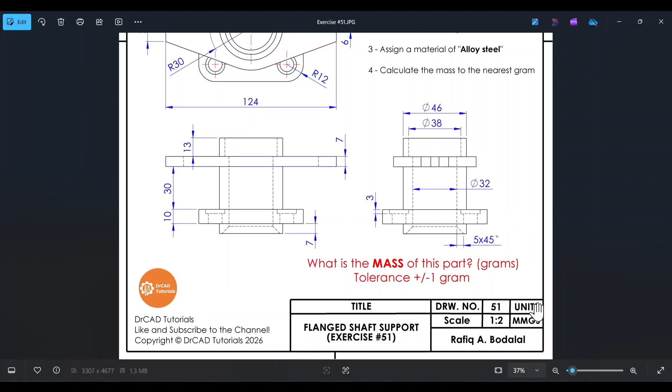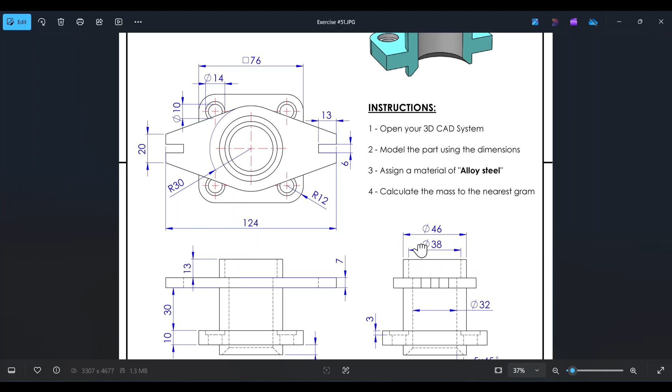Of course, we also have a set of instructions which are, needless to say, pretty self-explanatory, but the key takeaway is that at the end of the modeling process, we need to assign a material of alloy steel. And of course, we have a question here at the bottom that says, what is the mass of this part in grams? The answer should be given within a tolerance of plus or minus 1 gram.

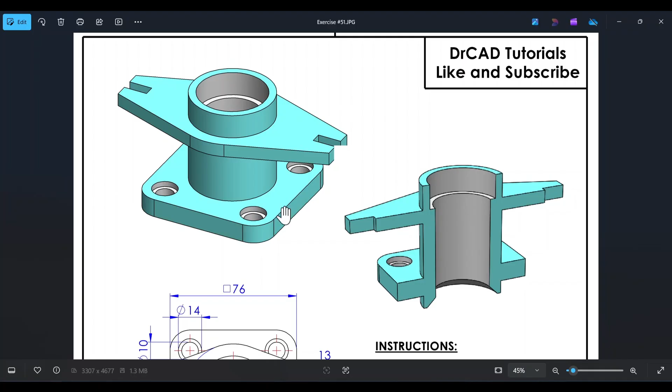We're going to follow a feature-driven approach in creating this component. The obvious first step would be to create the square base flange, which involves using the center rectangle tool, and then using the fillet tool to round out the four corners of the square. Then, of course, we're going to use the extrude boss base tool to create thickness.

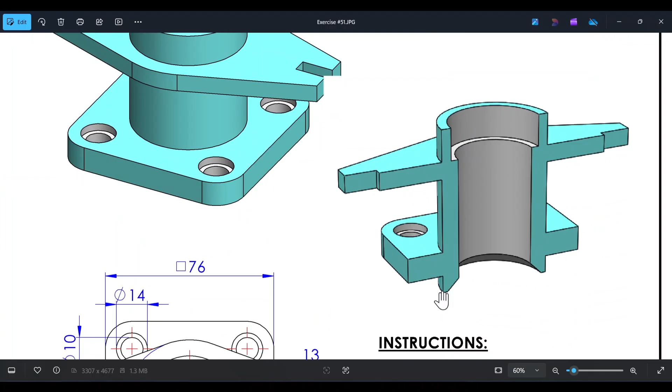After that, we're going to work on creating the cylinders. We have the top cylinder and the bottom cylinder. If we look at the section view, we should clearly see that we have a bottom cylinder. Again, we're going to use the circle tool, and then use the extrude boss base tool.

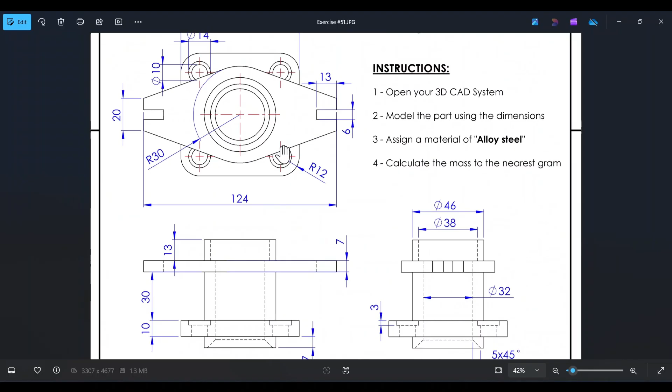After that, we're actually going to create the four mounting holes for the square base flange. These are four counterbore holes. So we're going to either use the hole wizard tool, or the more intuitive approach would be to use the extrude cut tool, and we're going to use it twice. First, to create the first cut for the larger circle, and then the cut for the smaller circle.

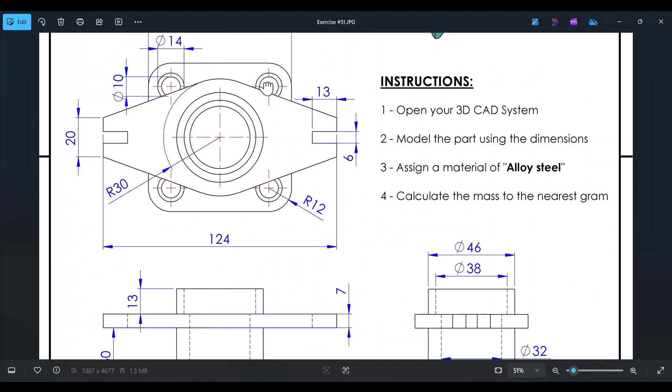After that, we're going to create the top flange. Of course, for this top flange, we have to create a new drawing plane, and the drawing plane needs to be 13 millimeters away relative to the top of the cylinder. That's a pretty simple procedure.

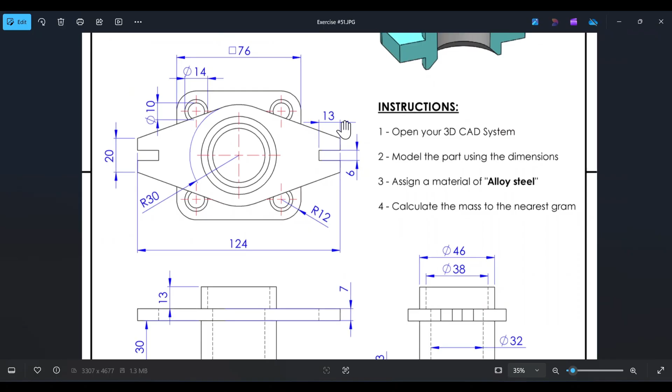Then we're going to sketch out the 2D profile of the top flange using a number of tools. Most importantly, we have the circle tool, and in addition, of course, the line tool and the rectangle tool, which is a very simple procedure.

Finally, we're going to open up the component along the y-axis. We're going to sketch out half of the opening here, the 2D sketch represented by the hidden line, and then use the revolve cut tool. That would conclude the modeling process.

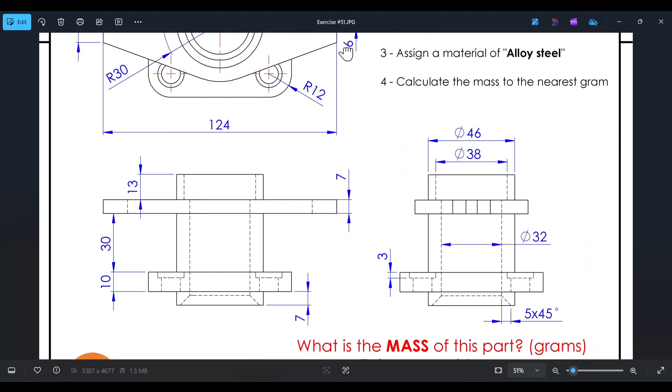Of course, finally, we shouldn't forget that we have a chamfer here at the bottom. If we look at the right view, we have a chamfer that is 5 millimeters by 45 degrees. That is the convention we're going to be following for the chamfer, a distance angle convention.

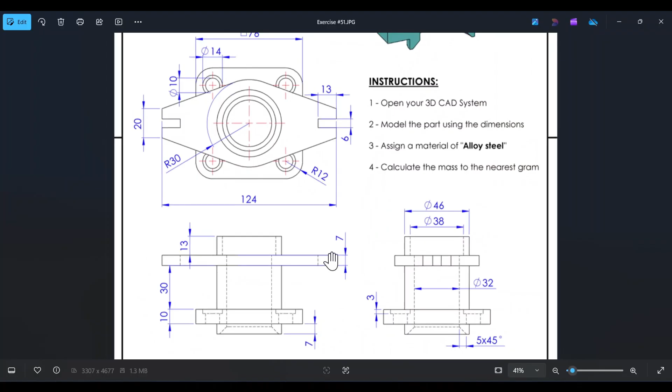All right, so this is a very simple exercise, something to have fun with. With that aside, let's get started with exercise number 51.

Okay, so let's start by creating a new SolidWorks part. Let's set the background to plain white, and let's copy exercise number 51 into SolidWorks.

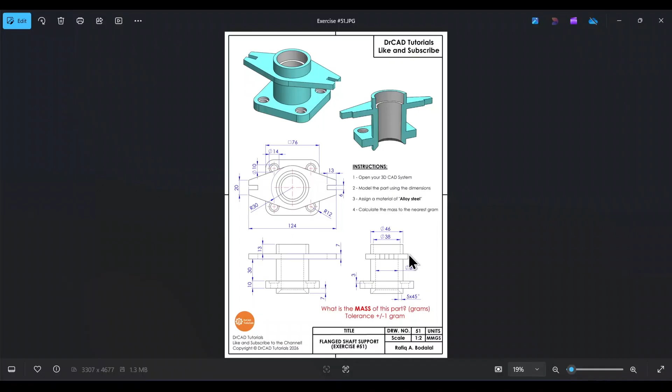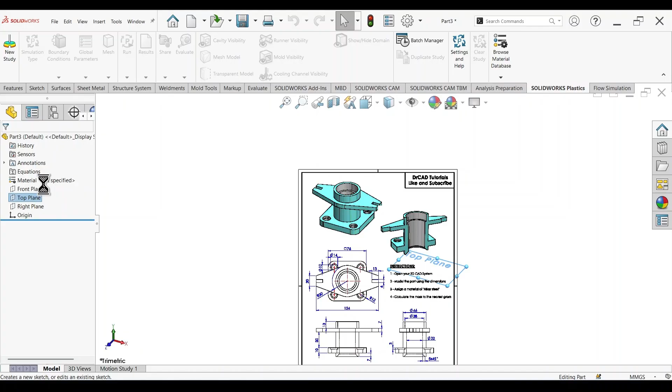Let's make this smaller and drag it upwards. As I said previously, the first step would be to create the square base flange of the component. So to start, let's select the top plane, sketch it, drag this to the side, and starting from the origin, use the center rectangle tool to create a rectangle.

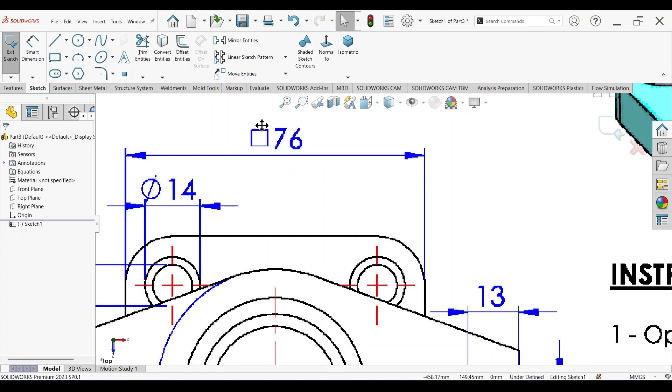Now if we look at the top view, we see that for this square base flange, we have a dimension of 76 millimeters, and we have a symbol here that looks like a square, telling us that the length of this edge and the opposite edge are equal, because it's a square. So let's activate the Smart Dimension tool and set this as 76 millimeters.

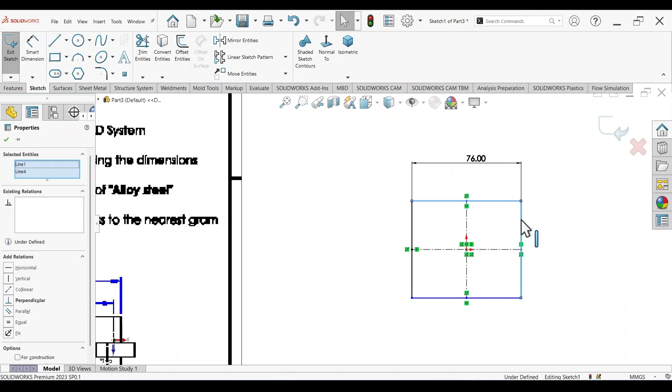Let's click on this entity, and holding down the Control key, click on this entity as well, and set the relation as equal. Now this edge here has a dimension of 76 millimeters, similar to what we created for this line.

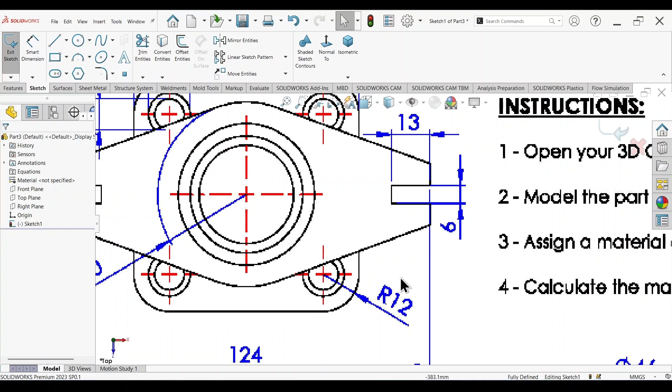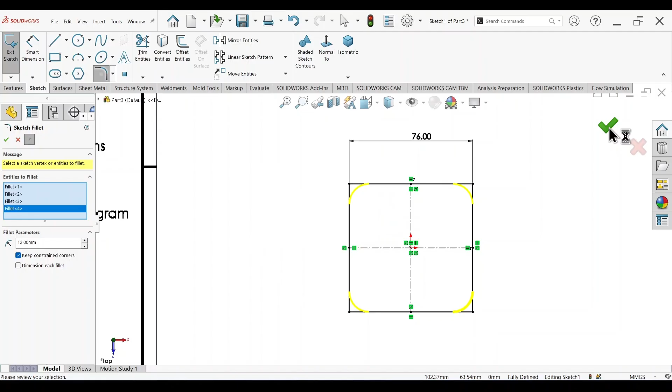If we look closely, we have fillets or rounded out edges for this square base flange, with a fillet radius of 12 millimeters. Let's select the fillet tool, set the fillet radius to 12 millimeters, and select the 4 corners of the square: 2, 3, and 4. Then click OK. So now we have the 2D sketch for the square base flange.

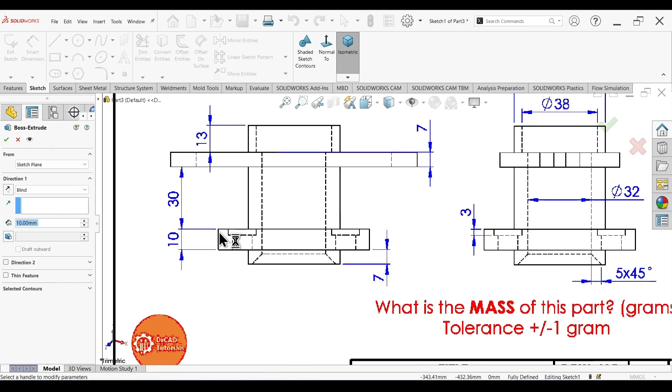Now just press the S key and click on Extrude Boss Base. If we look at the side view here, we see that the base flange has a thickness of 10 millimeters, so by default it's already set to 10. Simply click on OK, and that creates the square base flange of the component.

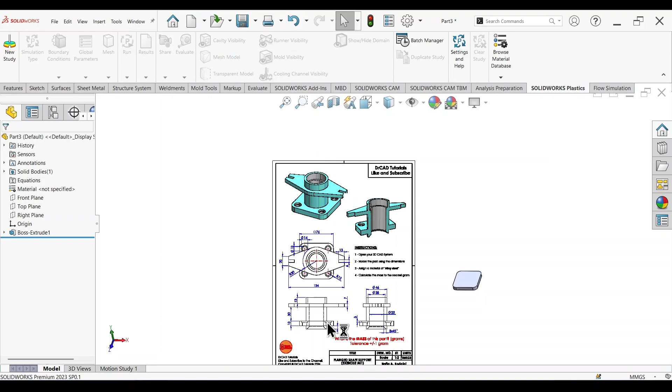If we look closely at the section view, we see that we have a cylinder protruding from the bottom face, with an outside diameter of 46 millimeters, similar to the cylinder at the top, protruding from the bottom with a thickness of 7 millimeters.

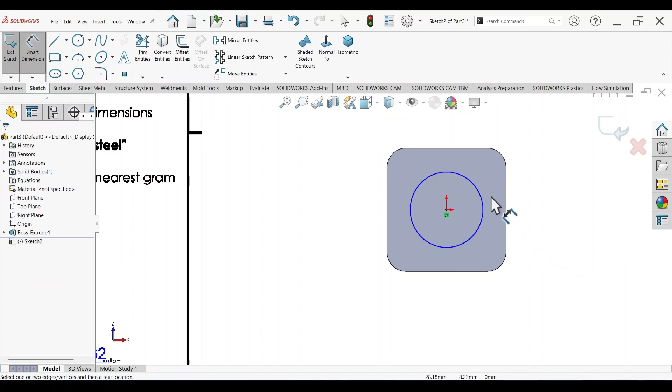So we're going to click on this back face, or bottom face, click on Sketch, activate the Circle tool, and from the origin draw a circle. Activate the Smart Dimension tool; the diameter of this circle should be 46 millimeters. Now press the S key, Extrude Boss Base, and set the extrusion height to 7 millimeters, then click OK. That creates the bottom cylinder, the protrusion at the bottom.

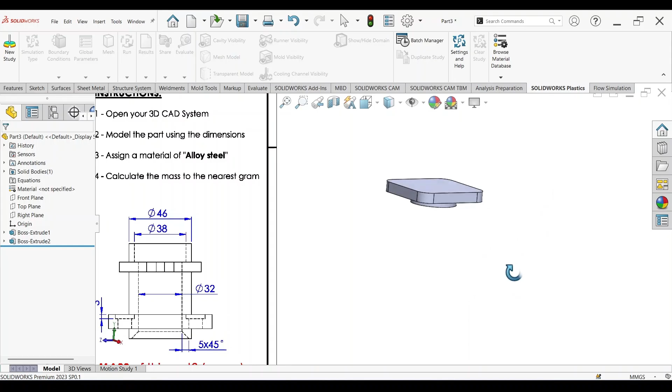We're going to perform a similar process for the cylinder at the top. Click on this top face, Sketch, activate the Circle tool, from the origin draw a circle, Smart Dimension, this should have a diameter of 46. Press the S key, Extrude Boss Base.

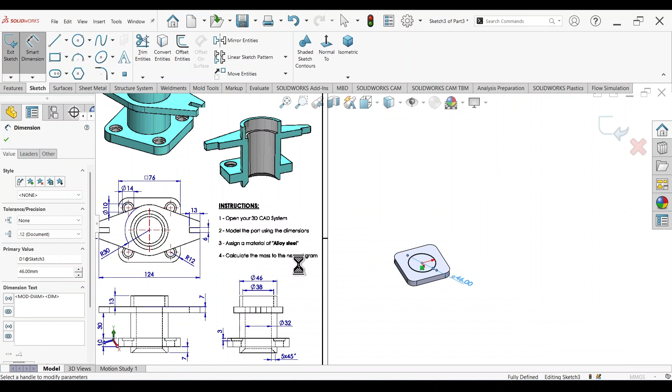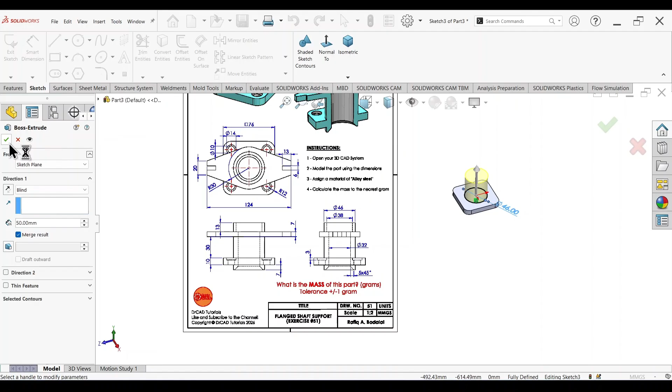The question is how high the extrusion should be. If we look closely, we have a dimension of 30, right? 7 plus 13 gives us a total height of 50. So this needs to be 50 millimeters. Click on OK, and that creates the cylinder at the top.

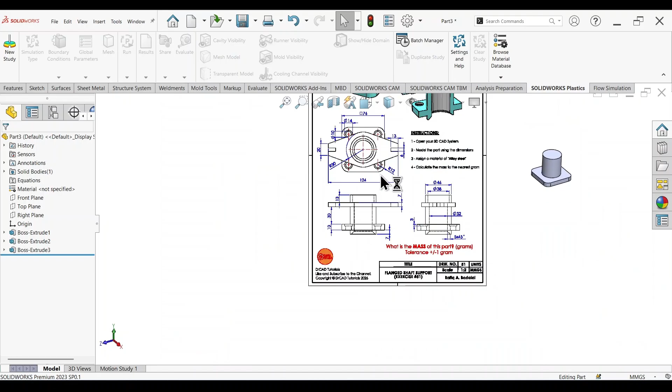Now if we look closely, we have a number of mounting holes for the square base flange, so let's create that. But we need to notice that these are counterbore holes, not normal holes, so we're actually dealing with 2 dimensions: the larger circle with a diameter of 14 millimeters, and the smaller circle with a diameter of 10 millimeters. Let's go ahead and create the first sketch.

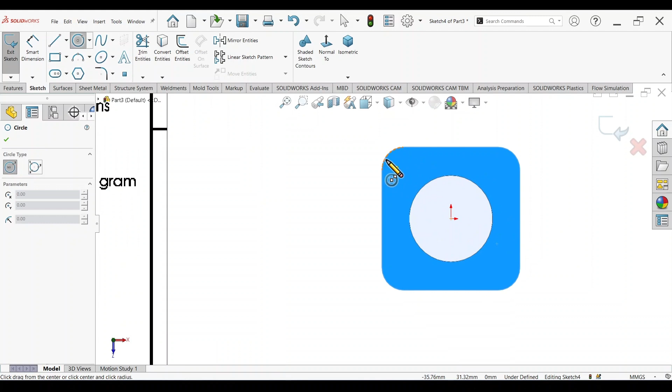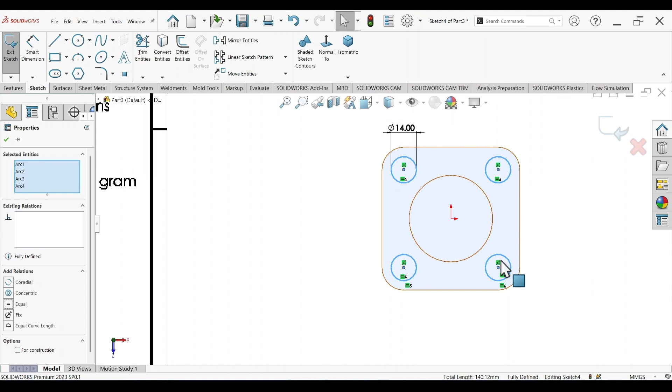So from this surface, Sketch, activate the Circle tool, and from these centers right here, we have 1, 2, 3, and 4. Activate the Smart Dimension tool, and we have a diameter of 14 millimeters for one of the circles. Click on the rest of the circles, holding down the Control key, selecting all 4, and set the relation as equal. So automatically the dimensions for the 3 remaining holes will be 14 as well.

Now just press the S key, Extrude Cut, and we're going to cut this sketch to a thickness of 3 millimeters. Set the extrusion cut to 3 millimeters, then click OK.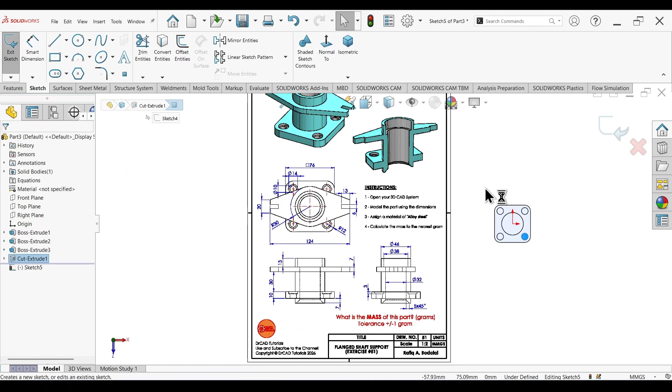Now click on this surface, Sketch, zoom in, activate the Circle tool, and from the center here draw a circle. We're going to do the same thing for the rest of the circles here: 1, 2, 3, and 4.

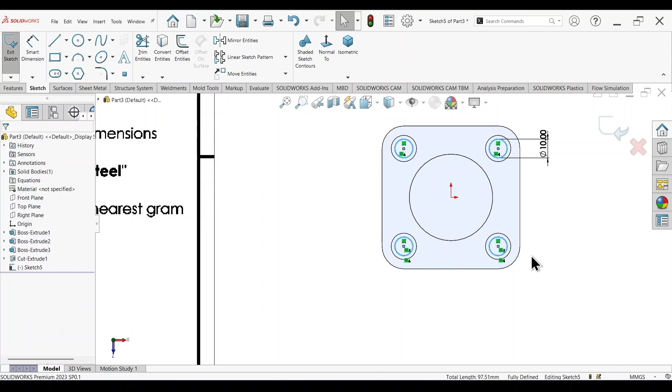All right. Activate the Smart Dimension tool. Let's set the diameter as 10 millimeters. We're going to select the remaining circles, holding down the Control key. Set the relation as equal. Now just press the S key, Extrude Cut. Right-click on your mouse and set the relation as up to next, okay? And then click OK. So that creates the 4 mounting holes for the base flange here, the square base flange.

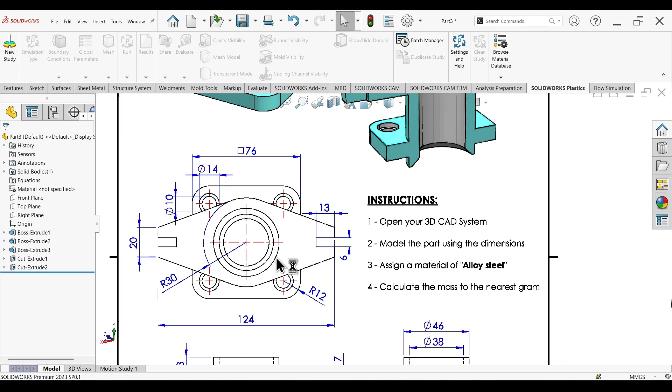All right, so what other features do we have? We have a flange here, top flange, but basically the flange is not situated on the top of the cylinder. It's actually at a distance from the top. Specifically, if we look at the side view, it's actually 13 millimeters away from the top of the cylinder. So what we have to do actually is create a new drawing plane.

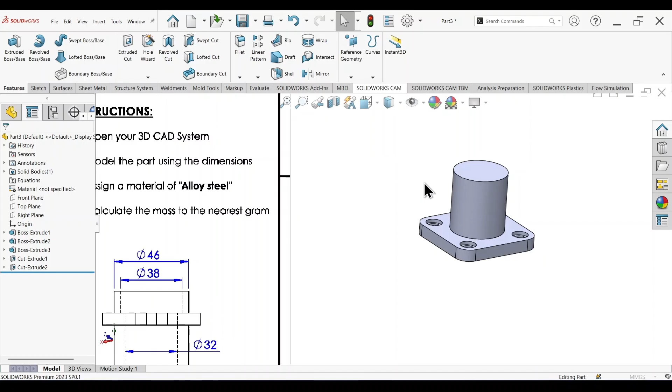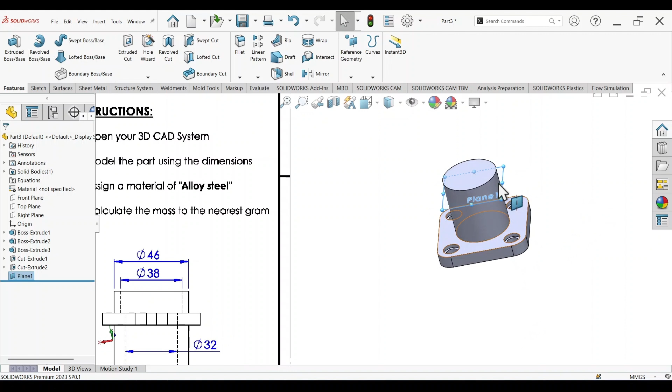So let's go ahead and go to Features, Reference Geometry, and then select Plane. All right, so here it's going to ask us for the first reference. Go ahead and select this top face, flip offset in the opposite direction, and then set the offset distance to 13 millimeters. And then click OK. So now we have a new drawing plane that is exactly 13 millimeters away from this top face here, top of the cylinder.

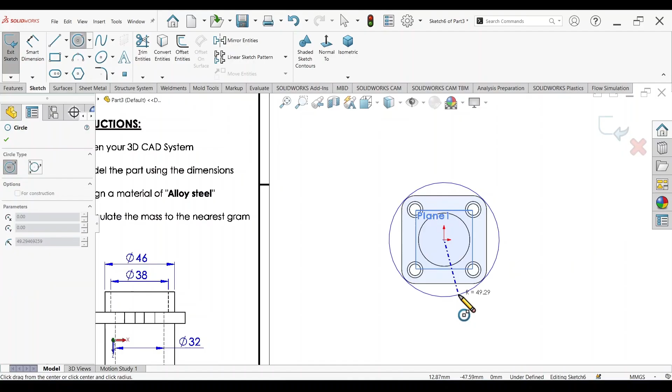All right, so now just right-click on this new drawing plane, sketch, and we're going to sketch out the 2D profile for this top flange. So starting from the origin, let's draw a circle. That's one circle. And then let's select midpoint line, and this needs to be directly situated relative to the origin. Let's draw a vertical line here.

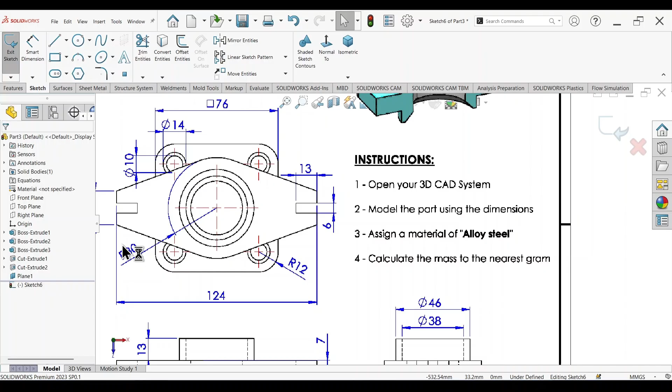All right. So now let's assign the dimensions. We have the dimension of this larger circle here, the radius of 30 millimeters. So automatically it's going to be a diameter of 60. So this should be 60. And if we look closely here, the length of this edge to the side is 20 millimeters. So this needs to be 20. Set the relation between the center of this circle, this line, and this origin point as horizontal.

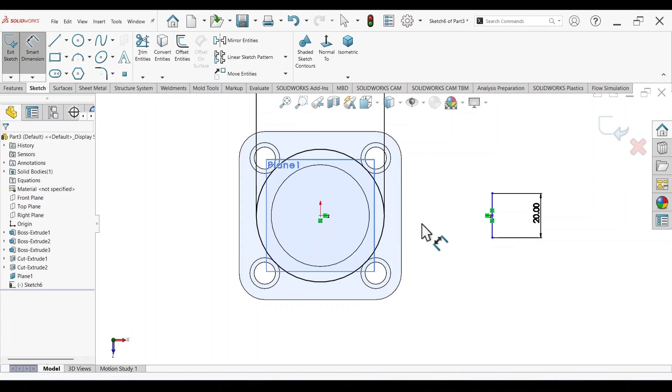All right, activate the Smart Dimension tool again. And if we look closely at the top view, we see that from one end of the flange to the next, it's 124. So starting from the origin all the way to this edge, it should be 124 divided by 2, since we have symmetry.

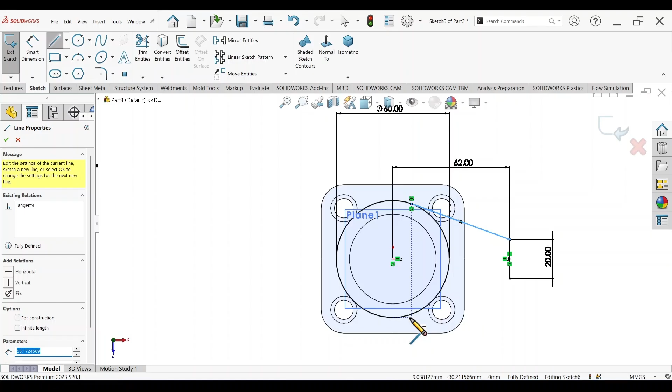All right, so now what we need to do is activate the line tool and just close off the sketch using 2 tangent lines. So this is 1 and this is 2. Just make sure that you have a tangency relation activated for the 2 lines, okay? Now we see very clearly that the sketch is fully defined. We just need to copy these lines to the other side.

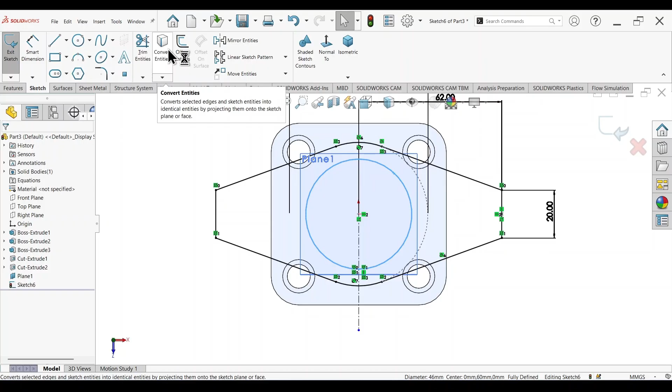So first of all draw a vertical mirror line all the way to the bottom. Activate the Mirror Entities tool. Select these lines, 1, 2, and 3. Mirror about this vertical line, and then click OK. Now simply trim away any extra entities. We have this and this. Select this outer circle, and then click on Convert Entities. Right, so that would create a perfect representation for the 2D sketch of the top flange.

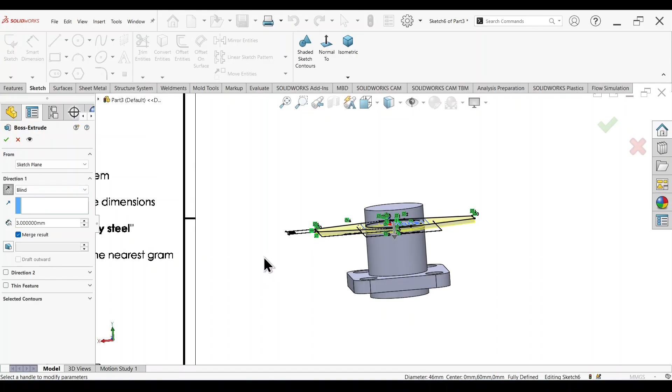All right, so now just press the S key, extrude boss base. And actually we're going to extrude this downwards. So let's flip the direction here. And we're going to extrude this to a thickness of 7 millimeters. We see that the thickness should be 7. So enter a thickness of 7, and then click OK. We don't need this plane anymore, so let's right-click here and then hide.

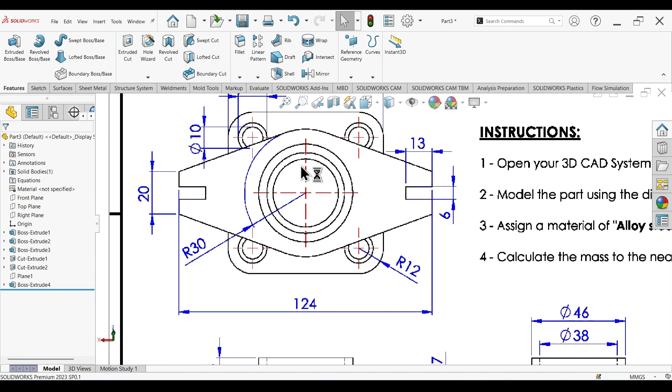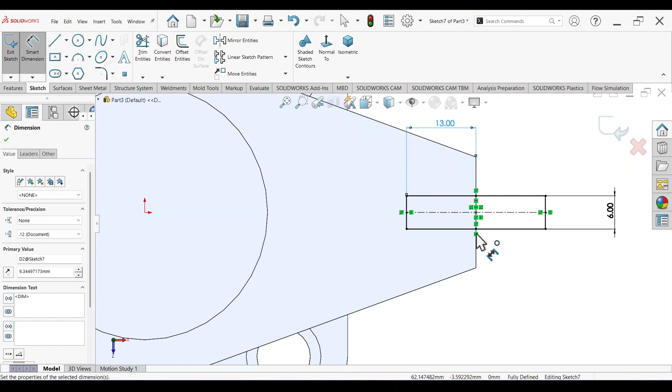Are we done with the flange? No, we actually have a notch on either end of the flange that is 13 millimeters by 6 millimeters, all right? So the strategy here is to select this face, sketch, activate the center rectangle tool, and from this point right here, let's draw a rectangle. Smart Dimension, length of this edge should be 6 millimeters. The distance from this edge to this edge should be 13. All right. Now just very simply press the S key, extrude cut.

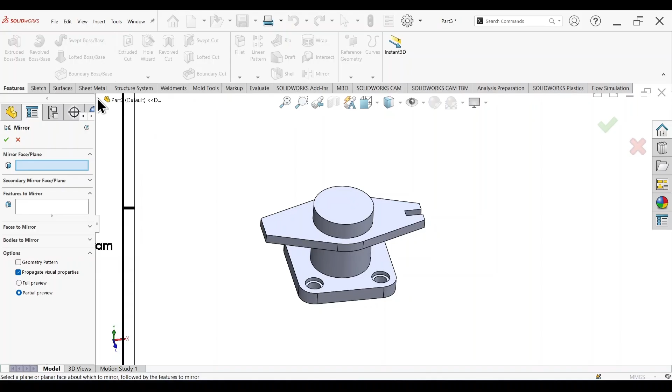The end condition is already set to up to next, and then click OK. So that creates the notch for one of the sides of the flange. We just need to copy this to the other side. So we're going to use the mirror tool. So now we're just going to select a reference plane. So go ahead and select the right plane. For the features to mirror, select the last operation that you just performed. And then click OK.

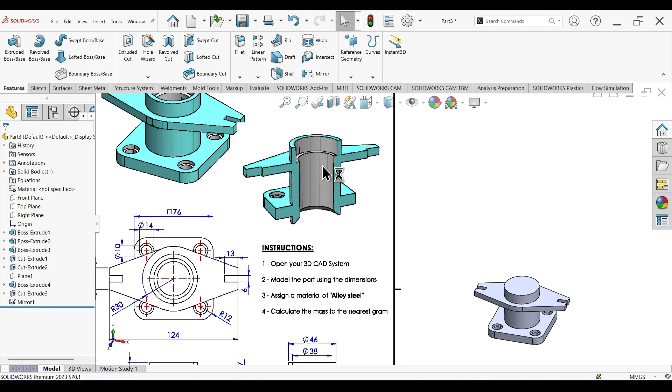All right, so that completes the top flange. Now we just have one last thing to do. If we look at the section view, we actually have an opening. This is a hollow solid, it's not filled out. It's actually hollow. So what we need to do is just click on the front plane, sketch, and let's activate the line tool. And from the bottom here, all the way to the top, let's draw a vertical line.

All right, so then we're just going to sketch out the opening here. If we look closely at the right view, we see that we have this opening. So we're going to sketch out half of this opening here, and then use the revolve cut tool to create the opening. All right, let's do this again, all the way to the bottom. All right, and then just move this sideways.

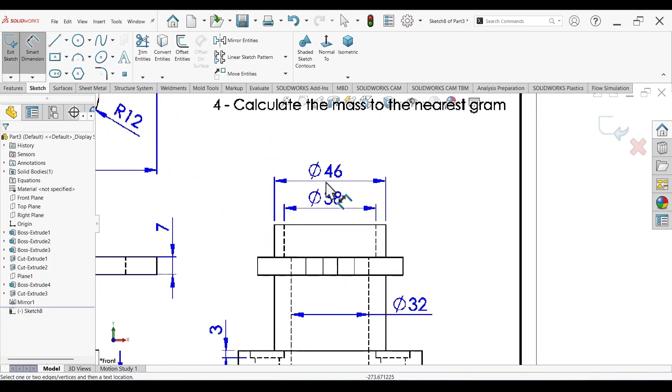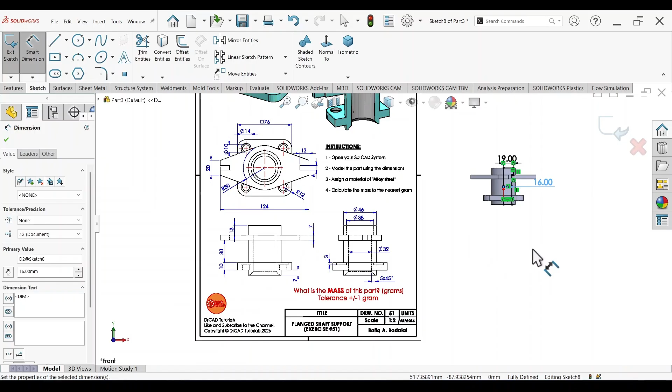Okay, now let's activate the Smart Dimension tool. We see that the opening, the top hole here, has a diameter of 38 millimeters. So this needs to be 38 divided by 2. All right, and the diameter of the smaller hole here should be 32. So this should be 32 divided by 2, which is 16. All right. Is there anything else we have to do? The sketch here is fully defined. We can see that the length of this edge here corresponds to the length of this cylinder, which is 13. So I think everything's ready.

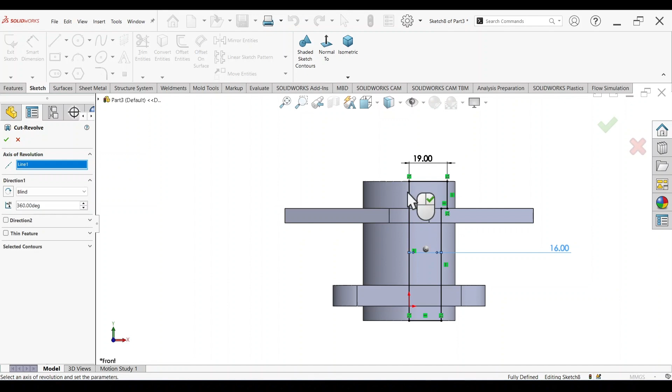So very simply, just press the S key, select Revolve Cut. Here it is going to ask us for the axis of revolution. Select this vertical line, and then click OK. All right. Are we done? No, we're not done. We actually have one last thing to do.

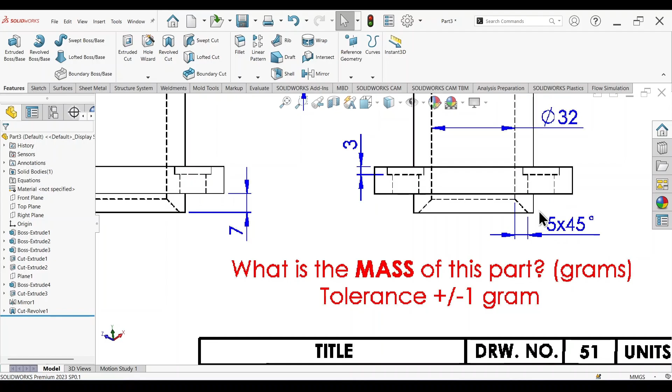There's a chamfer here at the bottom. And if we look at the side view right here, the right view, we have a chamfer that is 5 millimeters by 45 degrees. So that is the convention system we're going to follow. We have the distance and angle convention. All right. So select chamfer here. Set the chamfer distance as 5 millimeters. And then go ahead and select this bottom edge. All right, and then click OK. All right, so that completes the modeling process.

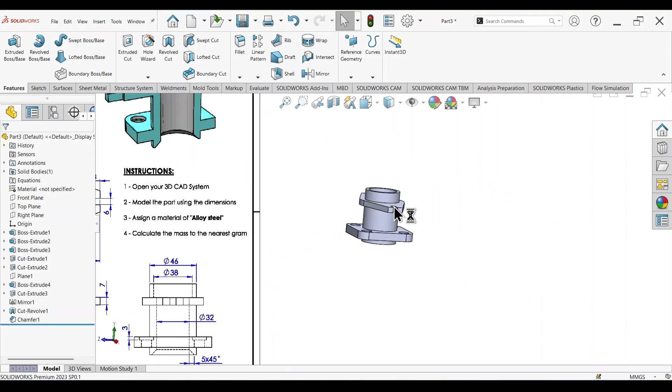We need to assign a material now. So just right click here, edit material. The material that we're going to use is alloy steel. Apply, close. All right, so let's delete this image. If you want, you can actually color this. So go to appearance. It's not going to affect the final answer here or determining the mass of the component. So let's go ahead and select a nice blue color.

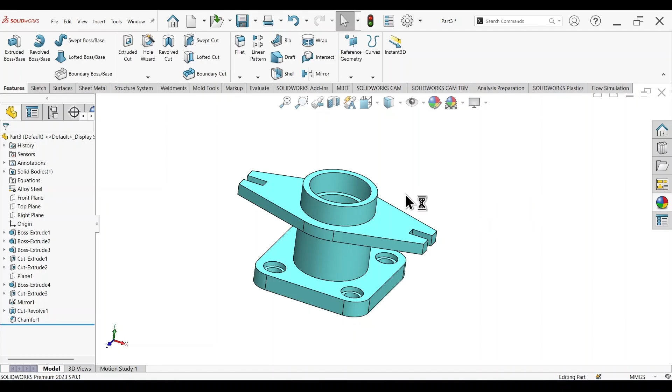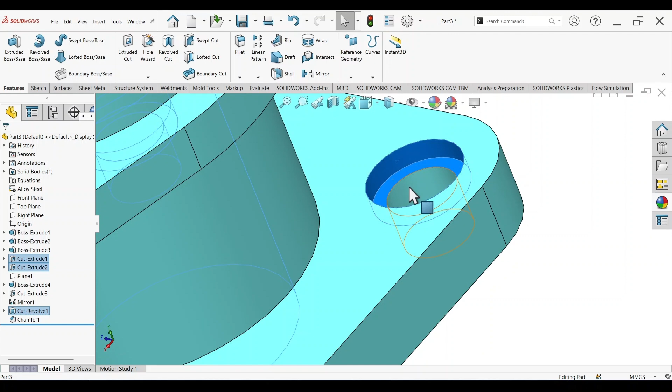Click OK. We have certain edges or faces that are going to remain metallic in color or in appearance. So just very simply select these edges or surfaces. Again, it's up to you. This is an artistic step. It's unnecessary, but I like to keep things looking good. Okay, you have this edge, and let's just go ahead and go to appearance again. Select grayscale, and let's just select a nice gray color. And then click OK. All right.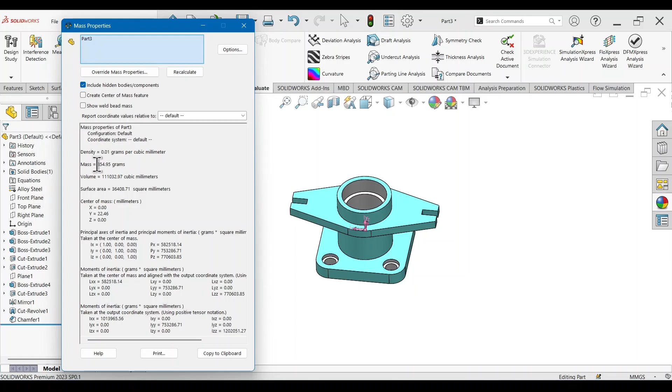So now everything's ready. Let's just go to Evaluate, Mass Properties. And if we look closely here, we have a final answer of 854.95. If you want to round things up, it could be 855. So that is our final answer. All right, so that concludes exercise number 51.